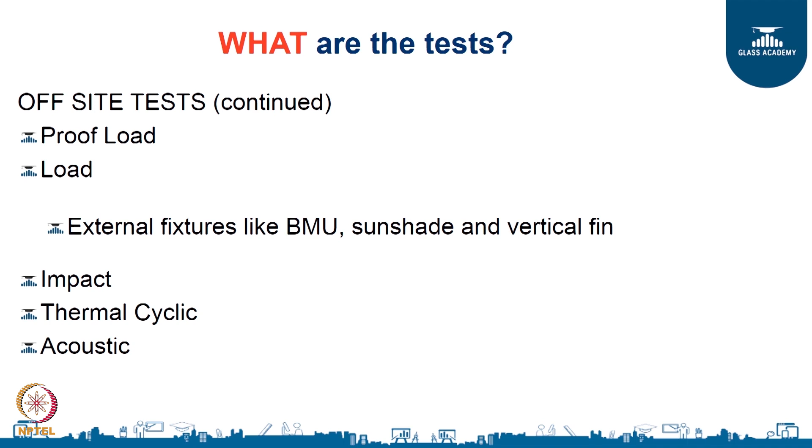Now, on site, once the off-site lab testing is done and everything passes, the architect and consultant say your sample is good to go, start production and start installations. So, in order to ensure the same care is taken at the site and to ensure quality, there are specifications again for checking water and air at the site.

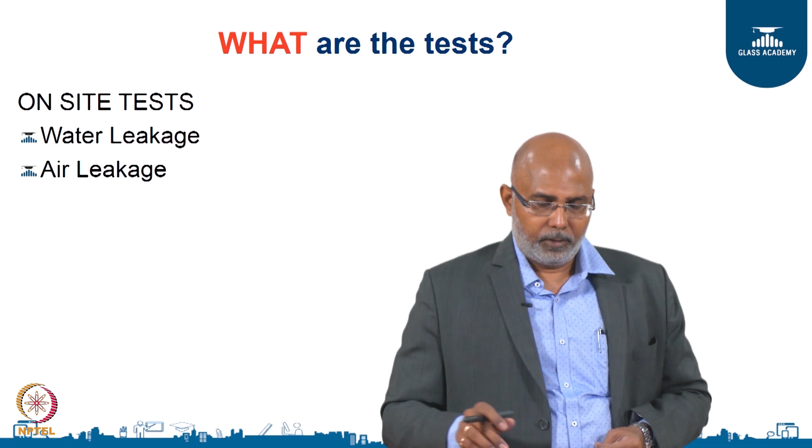For water testing, you have a specific nozzle as per AAMA 501.2, and a calibrated pressure gauge. High pressure water is sprayed in a particular pattern through this specified nozzle onto the vertical and horizontal grooves. This is a random sample selected by the architect - nobody knows which area will be tested, it could be any area. The testing covers all the vertical and horizontal grooves, with a typical sample of 3 meters by 3 meters, taking about an hour and a half to check all joints of that sample, while people stand inside the building observing it. Obviously, the pass/fail criteria is that no water should come inside.

For air leakage testing at site, we build a small temporary chamber using very thin plywood, connect a blower, and use a manometer to measure the differential pressure. We have the array of nozzles from outside, just like in the lab, for 15 minutes, checking for water if it's a window, and an airflow meter in the blower measures the leak through the sample at the site. These tests are done to counter-check whether it matches what happened during the lab test.

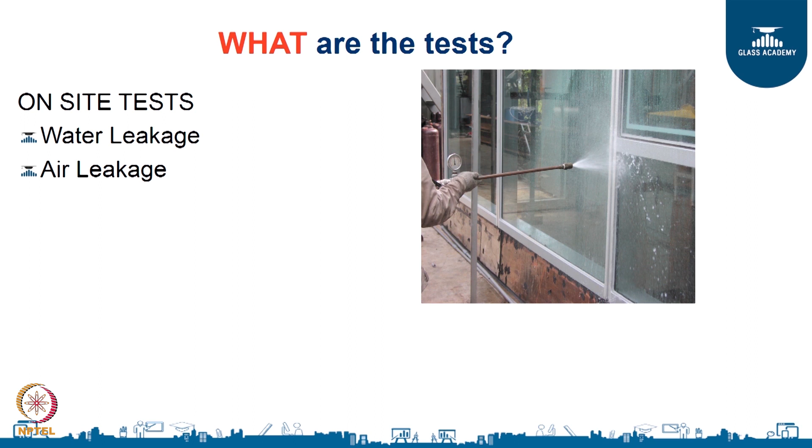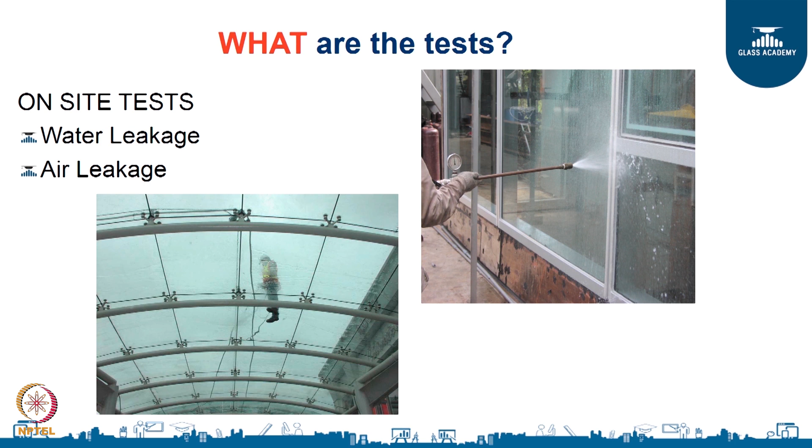This is very essential, especially the water test, for skylights used in public spaces, because even a small hole on top can lead to a lot of water leakage and cause accidents from people slipping and falling, or damage to property or the interiors of the building. So on-site water tests are very important to ensure consistency of delivery at the site by the fabricator.

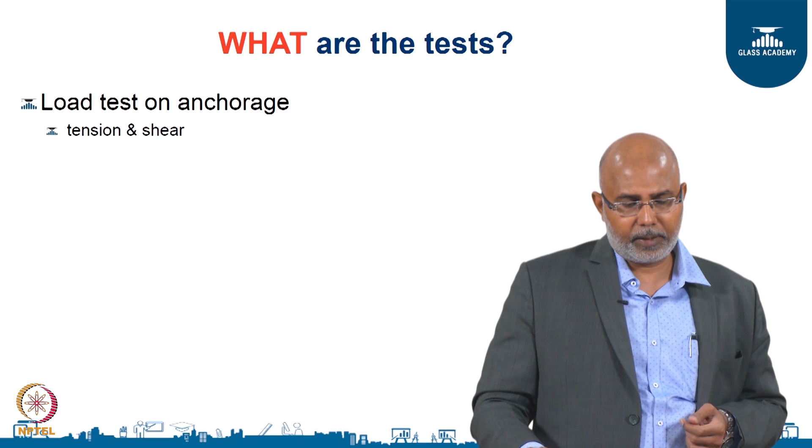Then load tests - basically you have expansion bolts anchored into the concrete, and those anchors hold the brackets onto which the entire facade is mounted. So there is a lot of load on those anchor bolts. There are tests to pull out and see whether the anchor bolts are able to take the load. These bolts are also tested on channels that are cast in - nowadays people cast channels into the concrete, and after the concrete is cast, the bolts are slid into that channel, and the bracket is installed on that channel. So we do a pull-out test to see whether the channel is able to take the design load without failure.

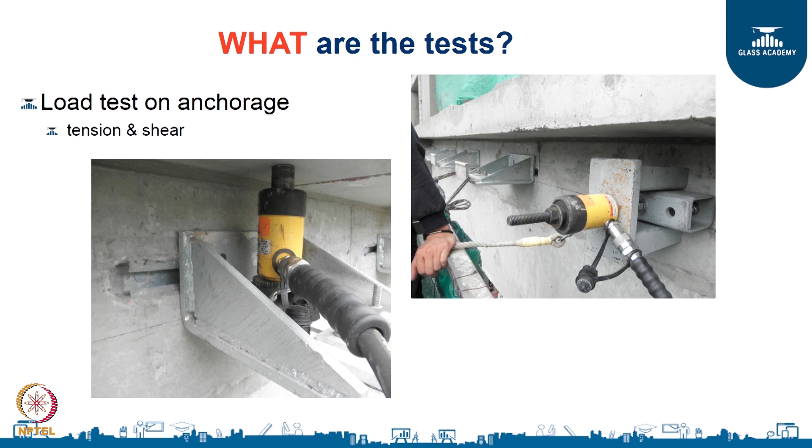And also the shearing of that, you push the thing on the side and ensure that the bolt does not shear off because of the load, vertical dead load.

Now, which are the standards to apply? The most prominent standards in the world now being used by consultants is the American standard, which is the ASTM or AAMA.

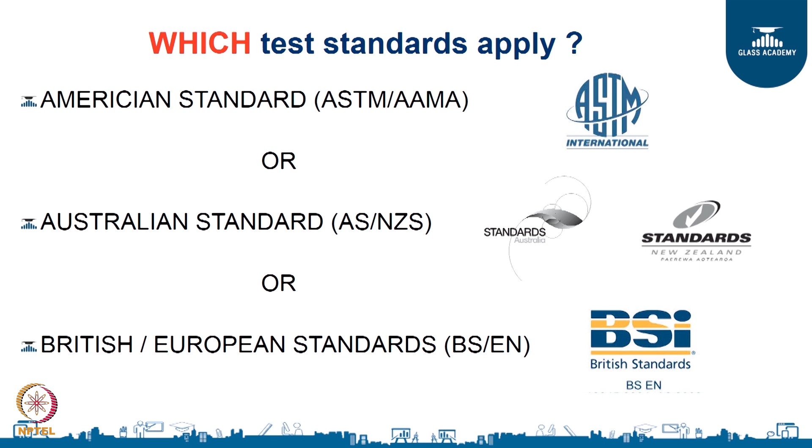Or the Australian New Zealand standard AS/NZS, or the British European standard BSEN. Now, which standards are good, which is bad? I would say all of them are equally good, and they have evolved over a period of time based on the requirements and based on the experience that these people had, and they have improved constantly and upgraded constantly. So, in that sense, whichever standard you follow, if you get a product which passes those standards, you can be assured that you are getting a good value for that product.

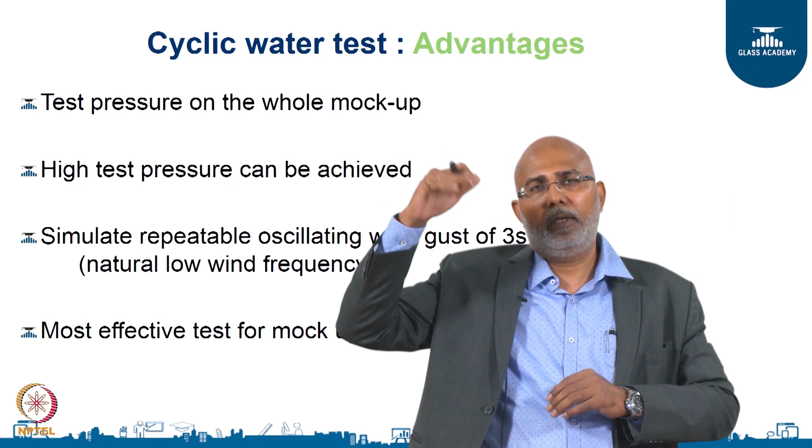Now, advantages in the cyclical test that we explained earlier is that the test pressure is on the entire mock-up. Every square inch of that mock-up has got the uniform pressure which is created in the chamber. Unlike dynamic, where the pressure is high in the periphery, and then as you go away at a distance it drops because it is open to sky. So here you have a uniform pressure on the entire sample, and you can go up to much higher pressures to test it, and its gusts, the 3 to 5 seconds, are almost like a natural low wind frequency being repeated, and it is very effective for mock-ups.

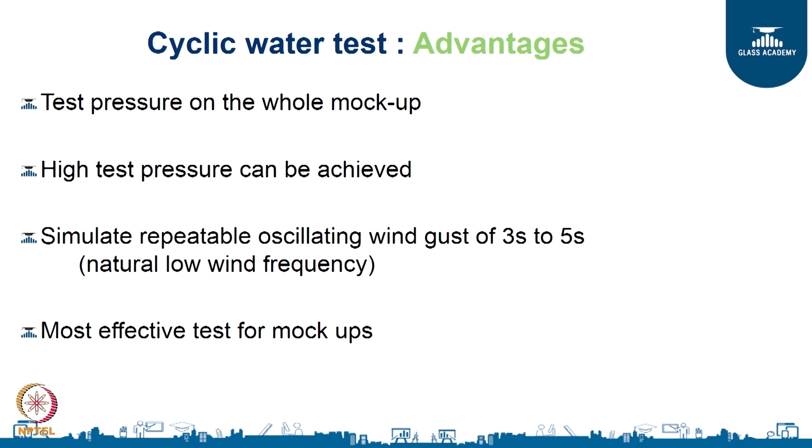It is a very difficult specification, and if the wall passes in a cyclic test, it is actually a very good result for the designer, and commendable because it is very stringent.

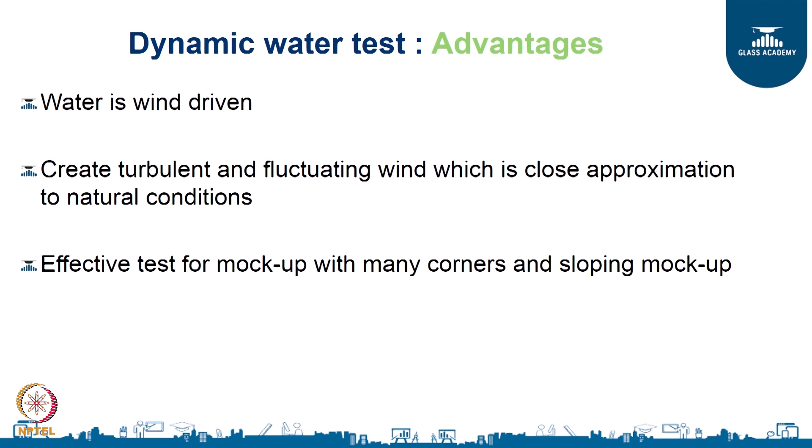Dynamic is water wind driven, so it simulates a cyclonic kind of atmosphere. It creates a turbulence and fluctuating wind which is close to natural conditions, and it is effective for mock-ups which have sloped roofs and external features and lots of corners, where it is very difficult to have a uniform spray of water in uniform pressure. It will be better to have a dynamic test covering the end, with wind going through these corners and creating their own turbulence, which in turn tests how good the sample is in terms of water resistance.

So there are videos attached to show you the static water, the dynamic water, the seismic movements, and the structural tests. You will be able to understand better when you see the pictures.

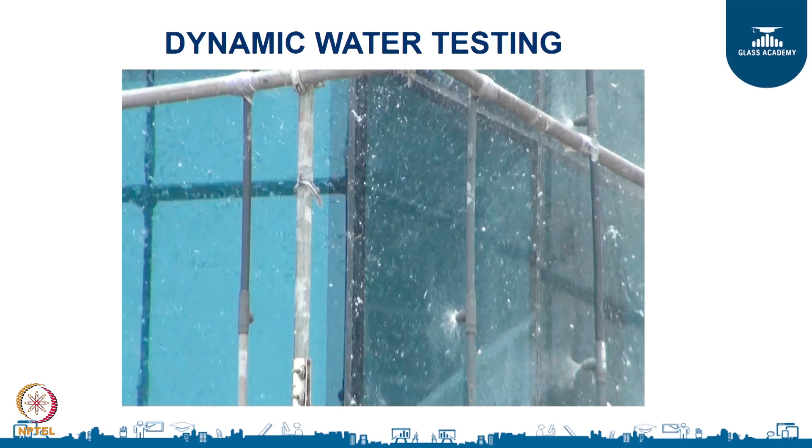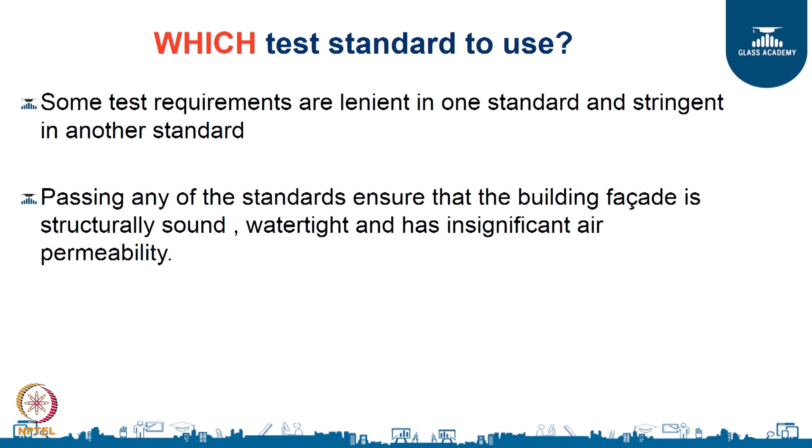Now, which standards to use? Some of them are lenient in one particular area, but very stringent in the next. So, in essence, whichever standard you pass, it does not matter which one it is, you will end up with a structurally sound, watertight, and highly efficient, air efficient, energy efficient facade.

Now, coming to the mock-up size, what should be the mock-up size? The specification says a minimum of 3 panels width and 2 floor height. That is the minimum size that should be tested, and sometimes the consultant also asks for a corner, because the corner is a very critical joint. It is 3 panel width with 2 panels in the corner. So this becomes the minimum size for a mock-up sample.

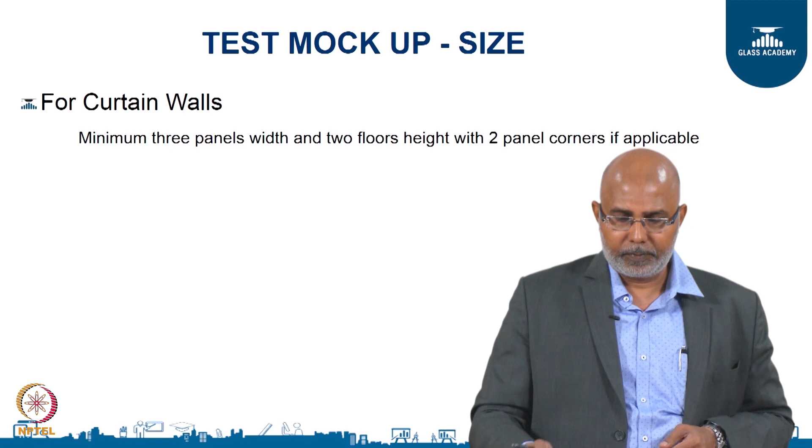There are some pictures of mock-up samples just to show you how it will look. This is at the laboratory, not the real building. The sample is constructed at the lab to test it, and it is an exact replica of what is happening at the site. The same design, the same profiles, the same elements, the same screw, bolt, nut, gaskets, glass which is used in the building, it is going to be tested. So this is how it will look as a sample.

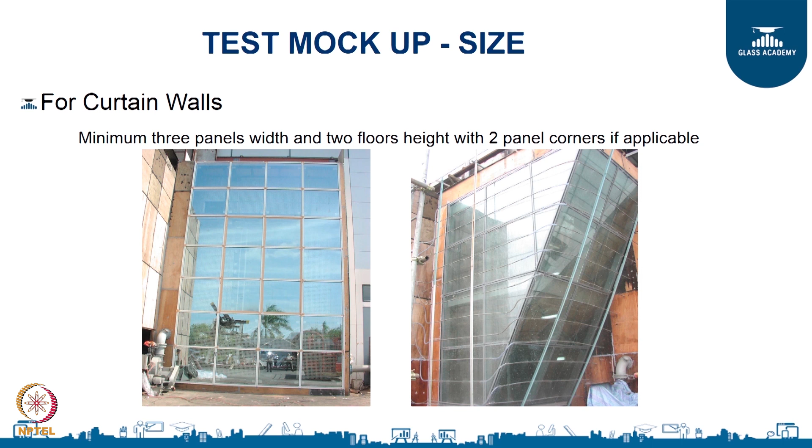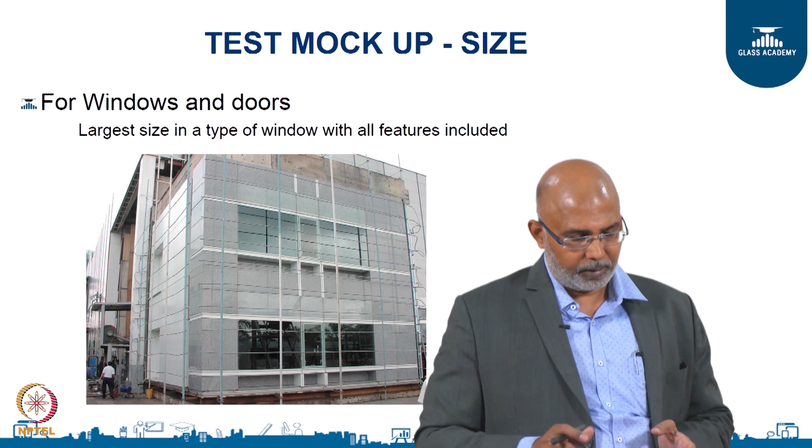This is another sample where you have a fixed glazing curtain wall with a window and an aluminum composite panel, and people are standing inside the sample while a water test is going on, checking if there is any leak through the window.

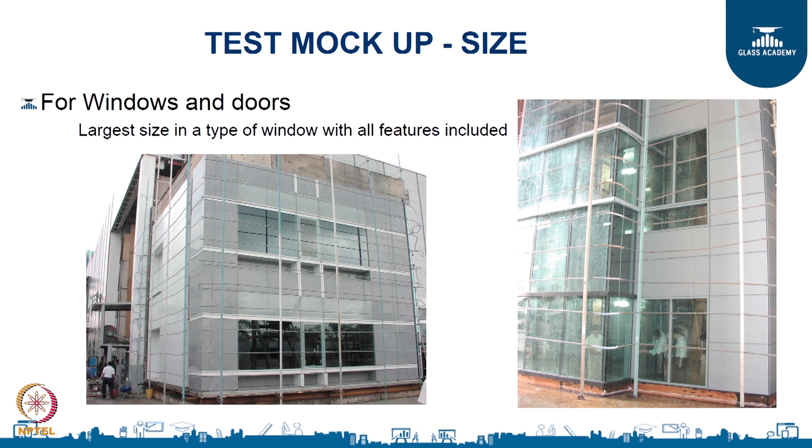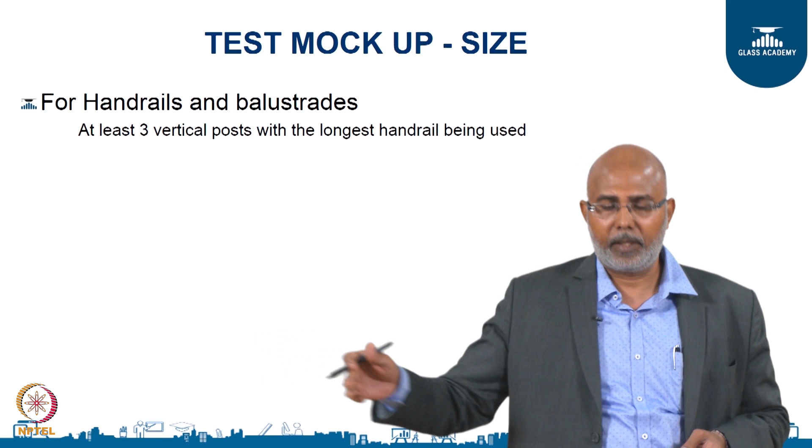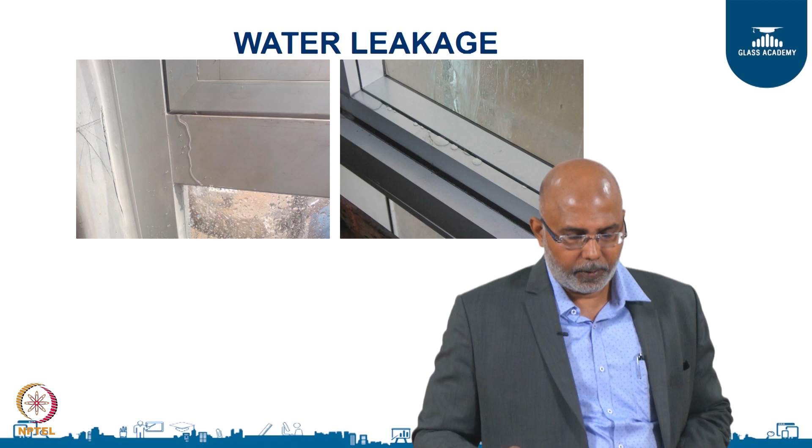So what are the common failures that we see during the test? Typical failures will be water leakage, where you see water leaking through the openables, droplets coming in through the joints.

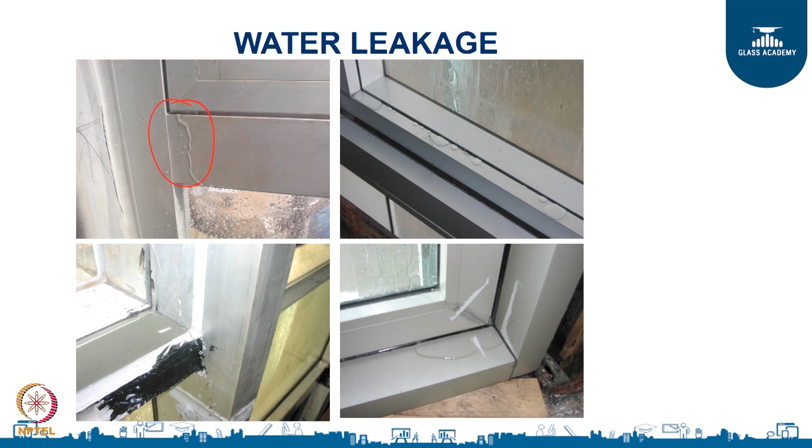These are typical fabrication issues, which can be addressed either because they have not cut it properly, or sometimes it is a design problem. For example, there are probably not enough drain holes on the window shutter on the outside, so the water is overflowing into the inside of the building. Water leakages are very dangerous and totally avoidable. If the design is good and the fabrication is good, you can avoid any kind of water coming into the building, because it is very difficult to identify where it is coming in from.

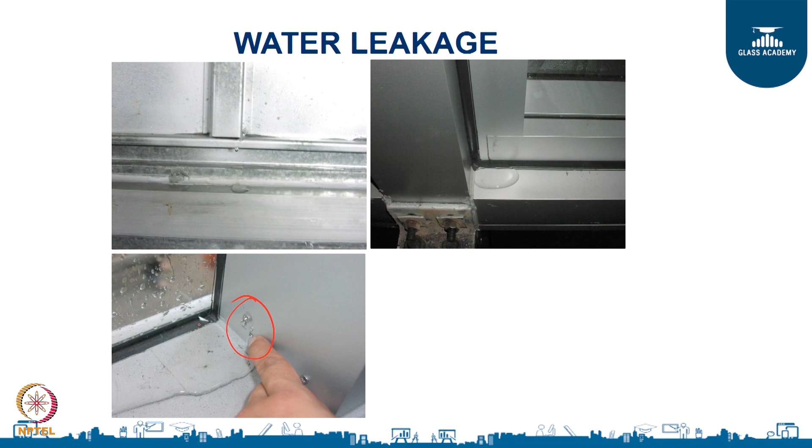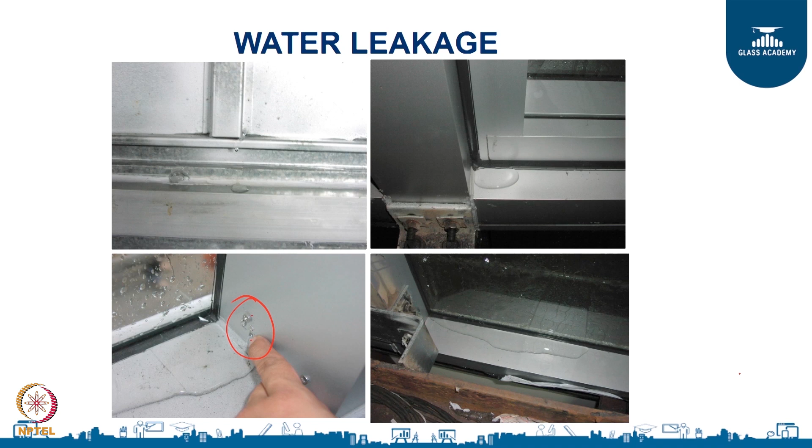For example, you see the small screw which has been put into the aluminum frame. Whenever there is a screw to be put, they usually use silicone on the screw and then tighten it, so the silicone closes the little holes created there. Here the screw has been put without that silicone, and there is water dripping in through that little hole. This is again an example of bad fabrication.

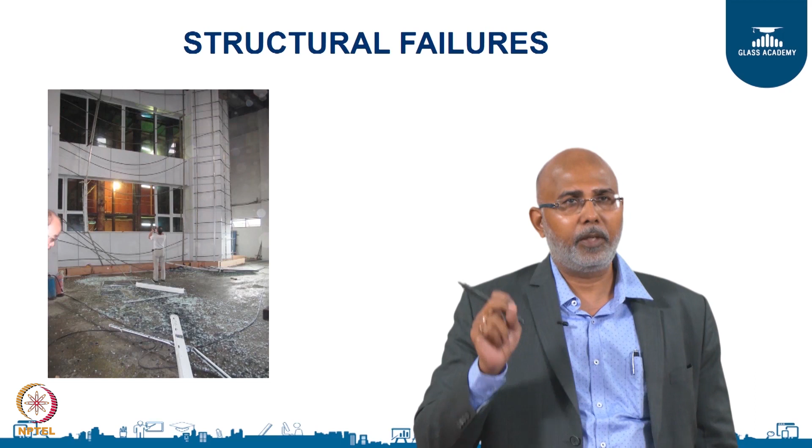Then you have structural failures. Here the entire glass is blown out, it is not able to hold tight. The wind loads, this will really happen in the building. If this is a 30-storied or 50-storied building, imagine what will happen if the glass shatters, and even a small piece of 2 square inches of glass falls from a 30 or 40-storied building, it comes down like a bullet, and if it hits somebody on the head, it is going to for sure break his skull. Here you see the aluminum gave way because of the structural load, it is not able to take the load. A panel has come out of the mock-up sample.

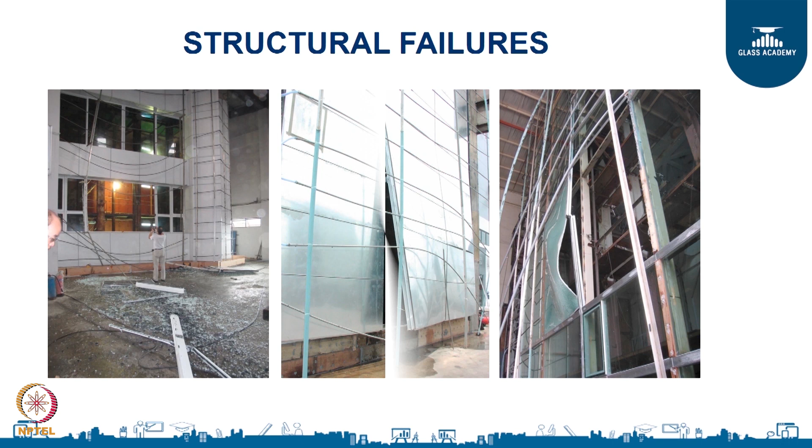These are all typical failures that we see, and then corrective action needs to be taken to ensure that this does not happen in the real building.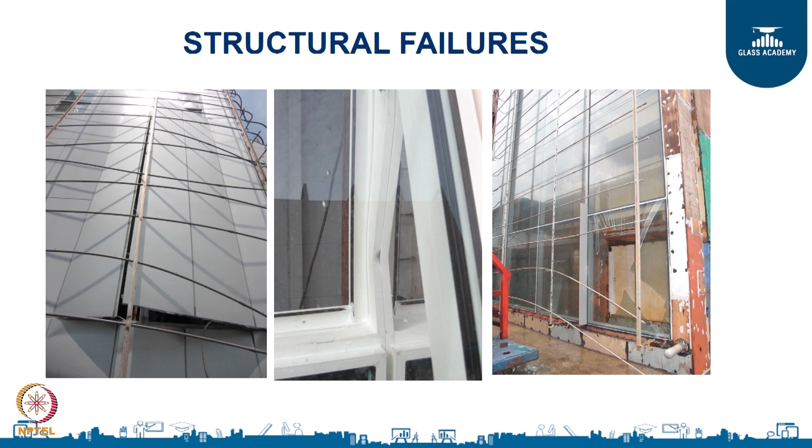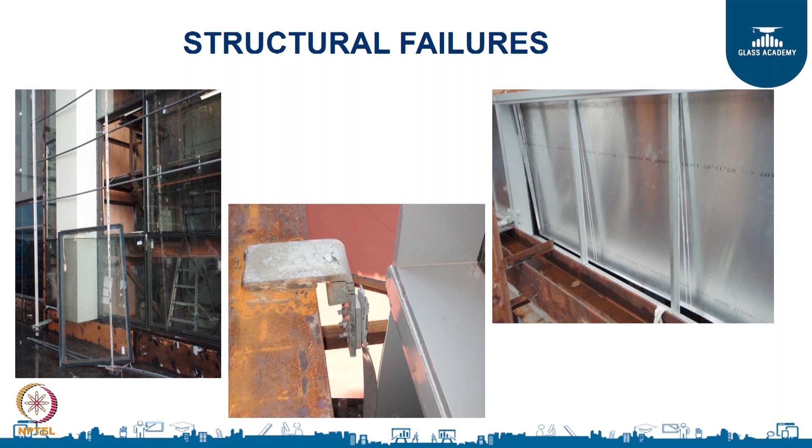Reinforcements are done, the aluminum itself is buckled because of the wind loads, or you have typical situations where the glass panel is delaminated, come out, the composite back pan GI tray which is there in this curtain wall has come off, not been anchored. The aluminum is sheared off from the bracket, just torn out because the thickness of the aluminum is not adequate at the point where it is anchored.

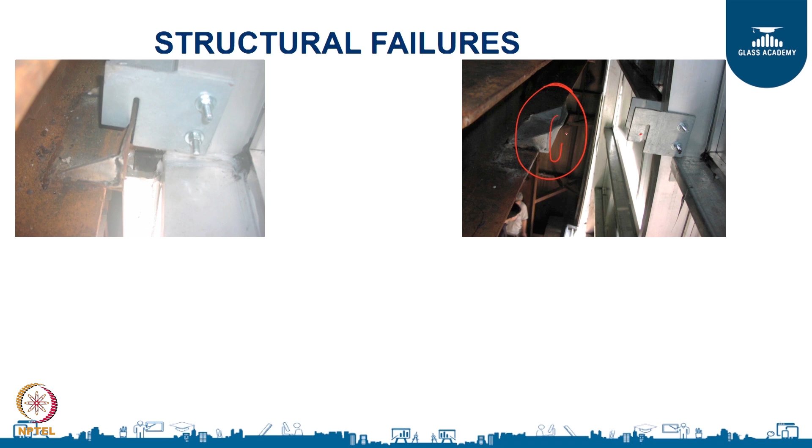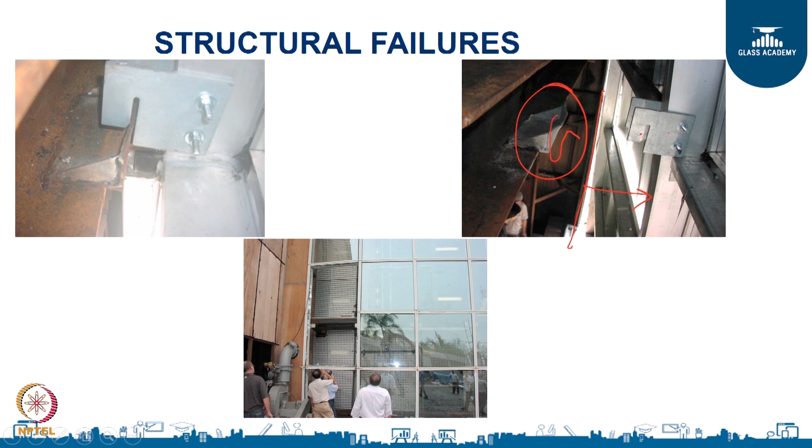The bracket has come out of this whole lock because the whole system has moved out. It is delaminated. Again, here you see the bracket is totally gone, distorted, and the lock which is supposed to be hooked in here has actually slipped out and come out. This is the slab, so this whole curtain wall has come out by so much. Here the glass is blown out. These are all typical structural failures that we see.

The pin is sheared for the locking pin.

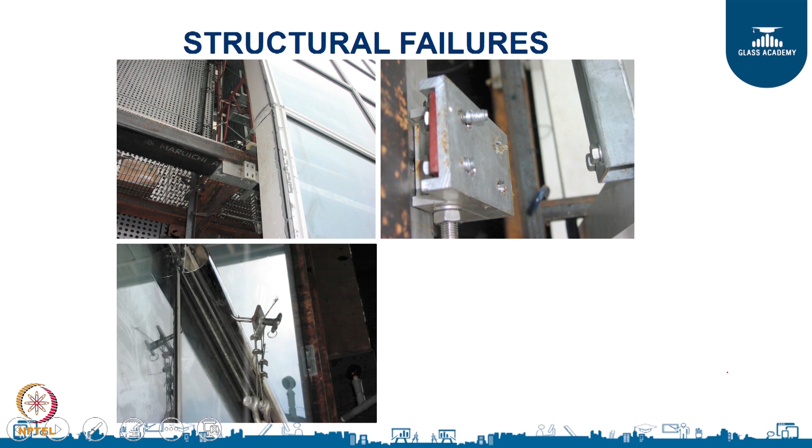So these are some of the failures that we see, and at the end of the day, any product that we use in our lives, we use it after it has been tested. That is how these products become iconic. What is the difference between a successful product, an iconic brand, and a cheap one? It is the consistency with which it performs. And how do you achieve that consistency? By putting it through a rigorous test, so that under normal conditions it performs beautifully.

So at the end of the day, a facade is like any other product. It is designed to do certain things, and there are clear established parameters. All we need to do is measure that and see whether the performance of that particular facade matches the parameters that have been specified, and if it does, then you get a good product.